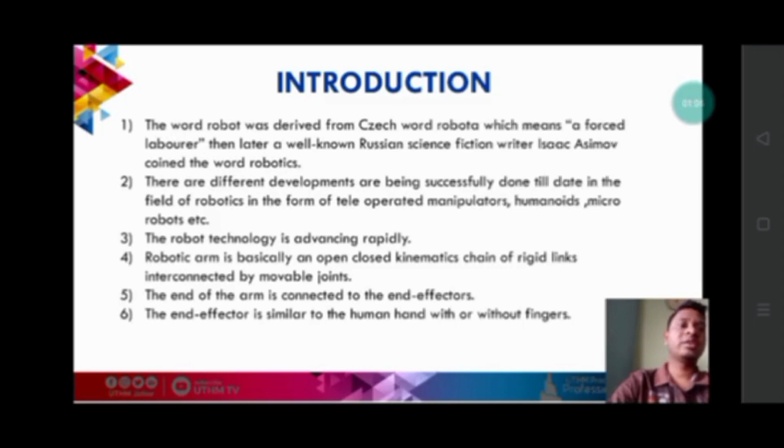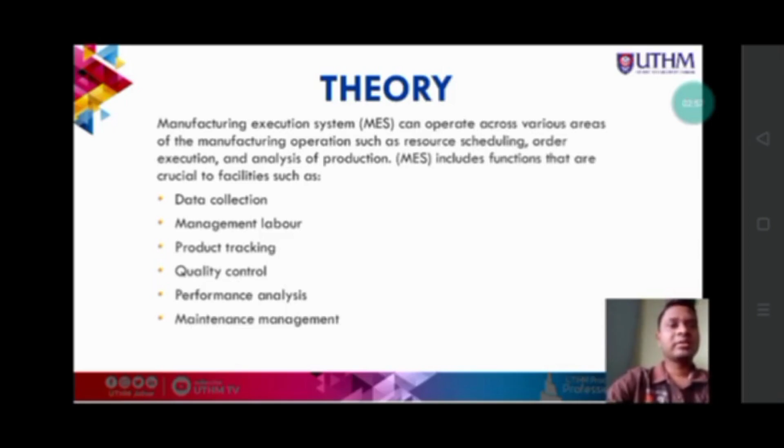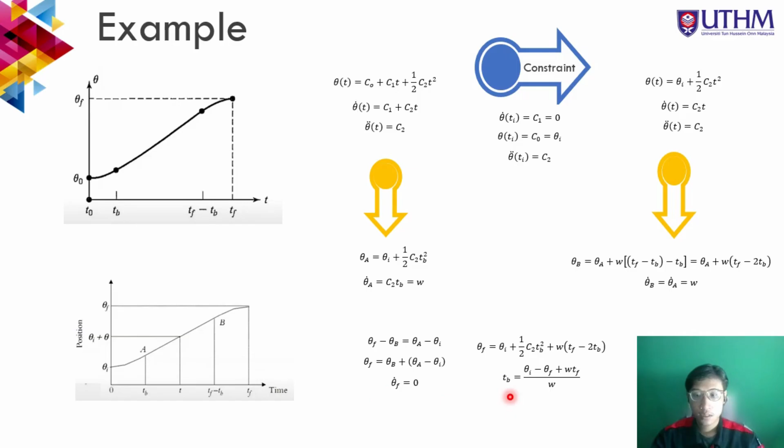As we know from the theory, the length from theta F to theta B is equivalent to theta A minus theta initial. From this understanding, we convert it to an equation and rearrange it to make theta F the subject. Then if we differentiate it, the angular velocity will be 0. This is the final equation of theta F, and this is TB. As for the coding part, this is the result that we get from the MATLAB simulation.

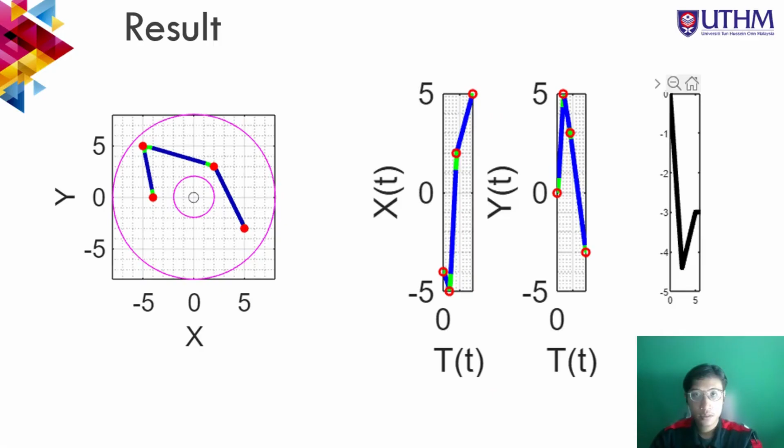Hello and salam sejahtera. My name is Muhammad Yusuf bin Akobs. We are from Group 3. Now I would like to present our workflow for the mini project. The workflow title is nail manufacturing. So let's proceed with the workflow.

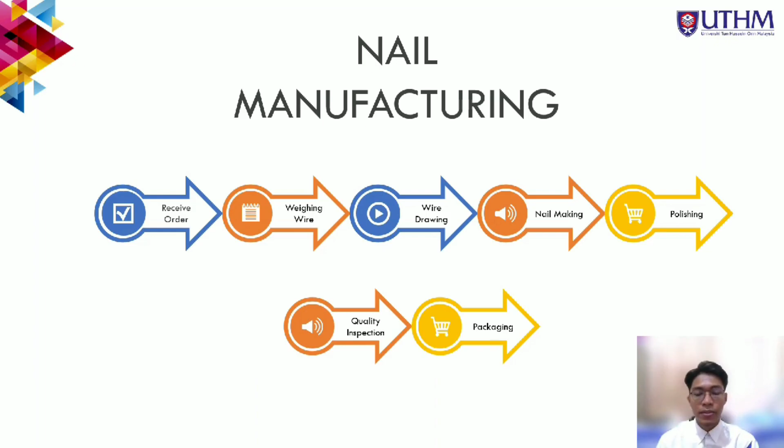This is the workflow, or the process for nail manufacturing. As we can see, there are 7 steps in the nail manufacturing process. First, we have receive orders, then weighing, wire drawing, nail making, polishing, quality inspection, and the last one is packaging. These are all the 7 steps for nail manufacturing, which we found on the internet, and it's quite interesting to learn about this kind of manufacturing.

For receive order, the instruction is that the order information will be shown on the screen. After the order for nail manufacturing has been received, it will be shown on the screen. The duration of this step is 5 minutes. During the 5 minutes, all the workers will know about the order. And the next step is weighing wire.

Actually, for weighing, the instruction is weighing the carbon steel wires to use the appropriate number. So the resource in is actually 75 kilogram carbon steel wires. We continue with 75 kilogram, and the resource output is 75 kilogram carbon steel wire. So from the weighing, we need to know what is the input and output, and obviously it's the same here. And the equipment is a weighing machine, the duration for this step is 5 minutes, and there is no checklist.

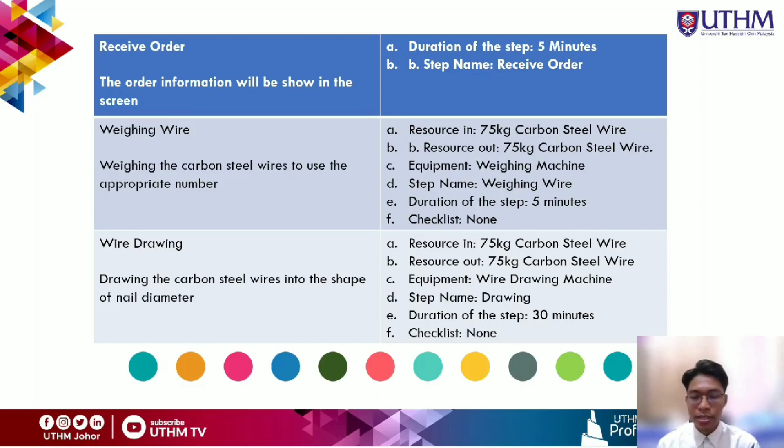And the next step is wire drawing. So the instruction is drawing the carbon steel wire into the shape of the nail diameter. The input is also 75 kilogram carbon steel wires, and it's the same with the output. The equipment used here is a wire drawing machine. For this step, the duration is 30 minutes, and it's quite long because the wire needs to be drawn, like we need to decrease the shape of the wires. So that's why it needs lots of time here.

Okay, for the process of nail making, the instruction is making and forming nails. The input here is 75 kilogram carbon steel wires, and the output from this process is 18,000 pieces of nail, and the equipment needed here is nail making machines. And obviously the duration is quite long, which is 30 minutes.

And the next process is polishing. After the nails have been made, we need to polish, which is washing and polishing the nails and putting them into the box. So the input here is 18,000 pieces of nail and one open box. And the output is one piece pack box. The equipment needed here is a nail washing machine, and the duration needed is 15 minutes. So after all the nails have been made, we need to polish them and then put them into the box.

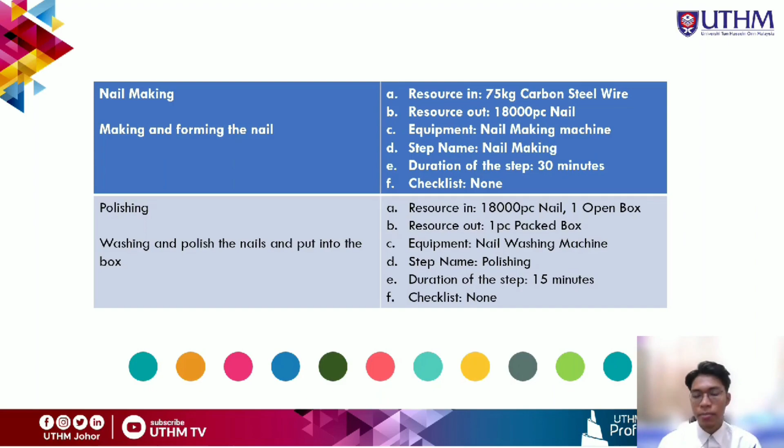Okay, quality inspection is important because you need to check the box and nails to know the condition of the products. So the resource in is one open box and one piece pack box. The output here is one piece pack box. There is no equipment here, and the duration is 5 minutes.

During this process, the checklist needs the type, which is text. The second is name, which is box checks. The third one is check the condition of the box for dents or blemishes, and the expected value is no dents. So that's it for the quality inspection.

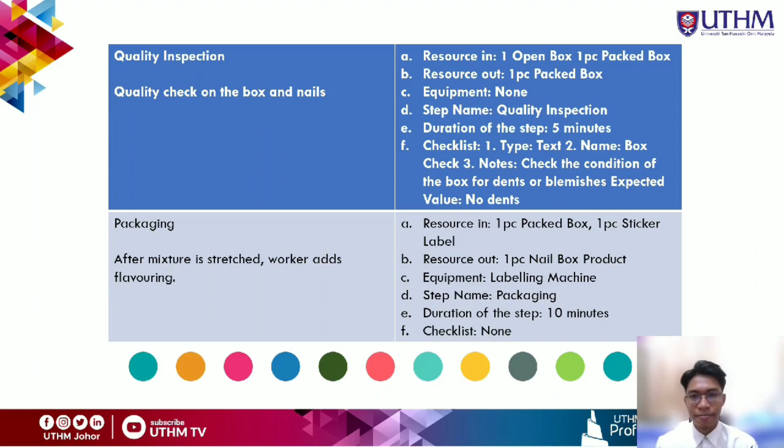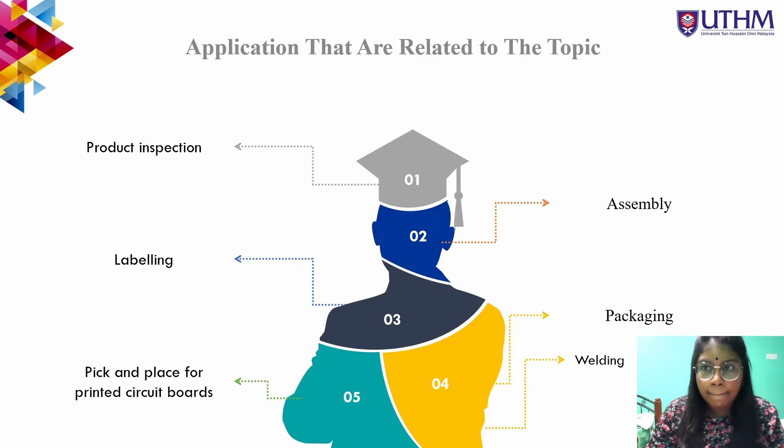Conclusion: the nail manufacturing production step is successful at the first part, receive the order, and the duration is only 5 minutes each. After that, the process needs to be continued to the next steps: weighing, wire drawing, nail making, polishing, quality inspection and packaging. This workflow is generated using the Arcstone website, and 75 kg of carbon steel was used for 18,000 pieces of nail in 1 hour with the wire drawing and nail making process. Reduction of the steps can make the process very fast, but the quality of nails will be affected, and reducing the steps will cut the cost.

Find the weak spots and show them up. The review of the process described in the previous stage is carried over into these steps. This might reveal recurring problems. If you take a closer look at how to create efficiency, these problems might slow down the progress or provide a result less than desirable. If we are able to recognize these obstacles and analyze them now, we'll be able to begin formulating strategies to overcome them. We recommend using the Arcstone website, which is helpful to generate the workflow, but steps need to be cut so that we can decrease the cost and increase the quality of the output of the product.